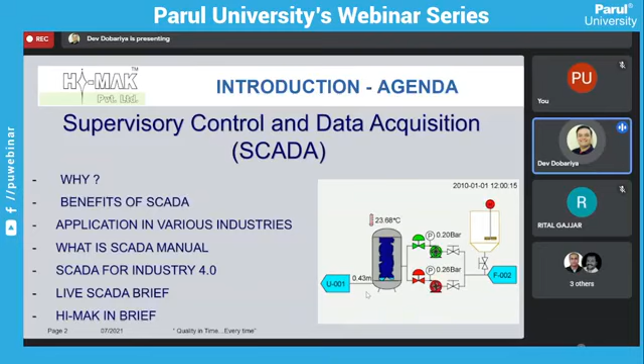That also we'll see. Then also we'll see a live SCADA available in the market. One of the engineers is available on site for a performance trial. That SCADA is about to be handed over by our customer to their end user who is actually using the SCADA. So we'll see the actual live demo, live screens of the dairy plant, online, and we'll brief about what we are doing as Hi-Mak.

So first we'll start with why we want SCADA. These are the key parameters where SCADA is required. A real-time status of the plant or machine. View of parameter values and interlocks. PID set points: proportional, integral and derivative. Set point entry and actual parameter, what PID output is there. Real-time trends, bar graphs, charts for viewing.

Process alarms, where some particular temperature or analog value is increasing or decreasing. If a particular limit is crossed, then an alarm will be generated. Then system alarms: if the PLC is not working, or some HMI is disconnected, power supply failed. Then operator alarms: if the operator has changed some values, it is to be logged. Because after 2 days, if someone asks who has changed this value, we cannot have any audit. So the operator alarm has to be logged in the system.

Status monitoring of network equipment. Like one plant is there and multiple sub-components will be there; it will be monitored in the SCADA. Then log view and report archive values. Anything that is changed, or any parameter, has to be logged with respect to time. It will be logged, and the report will be archived, or we can see the report based on time. We can report based on batch value, or upon change request; that kind of report will be generated.

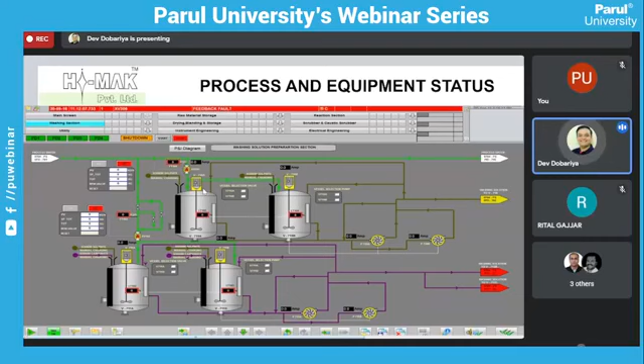Then faceplates. A faceplate is basically where each pump, motor, valve will have multiple information. If we see in the screen, these are main screens where we have multiple pumps and fans, or agitation will be there. But sharing the multiple information on a single small pump is difficult. For that, SCADA is putting a faceplate on the particular pump, fan, valves, agitator, PID blocks, and that will be popped up by faceplates.

Once you click on the pump, this faceplate will pop up and be shown. We can see the multiple data on the faceplates. Now we'll see what SCADA will help us with.

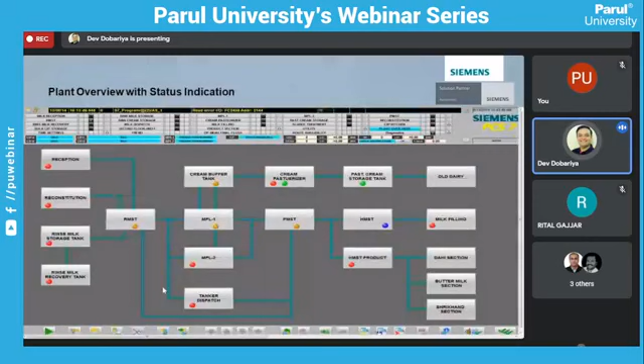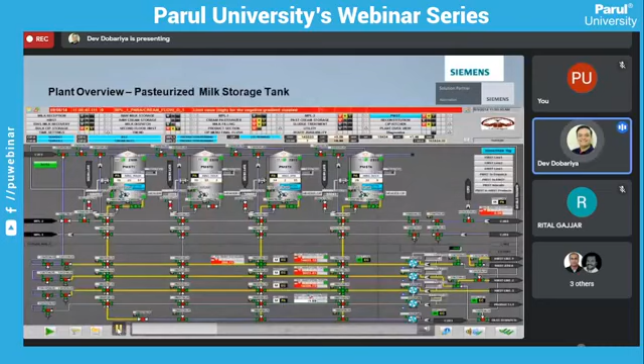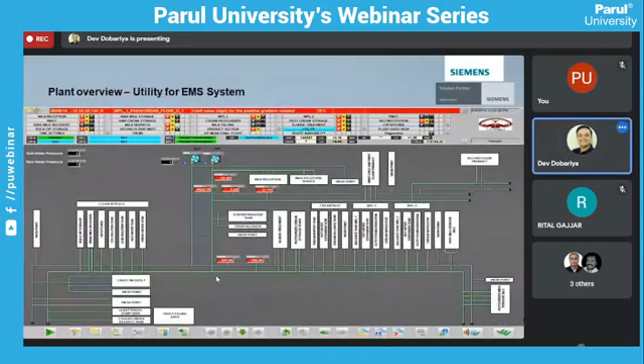If you visit this dairy, they will allow you, and you can see all the panels or automation system, or DCS system. There is no manual intervention. The complete process is working on auto mode. So we'll see a few screens of this DCS system. These are the system architecture for the SCADA. These are the area block diagrams we have shared. These are pumps and raw material silos. These are the main milk processing line. These are the packing machine interface. And these are tank farm areas and utility interface.

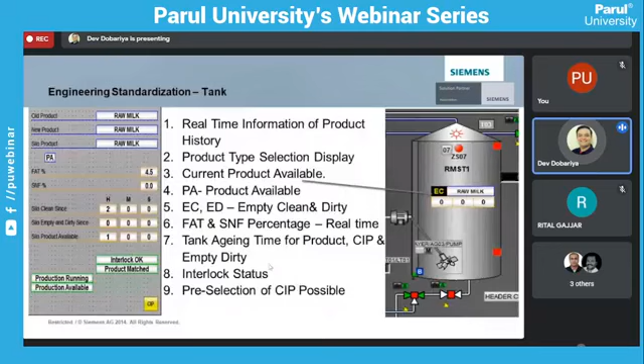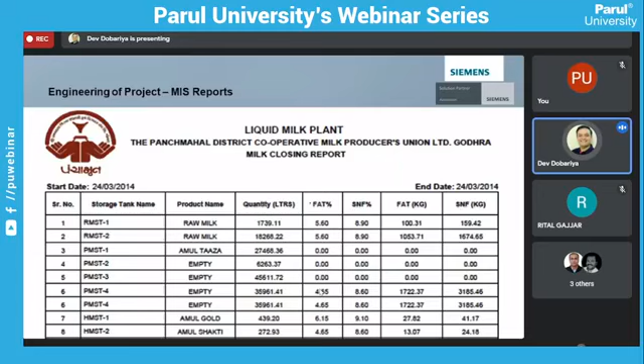Then how this automation will be is based on control matrix, tank farm or tank interface, then pipe and engineering section. We have multiple block diagrams before the SCADA is prepared. Here the engineering priorities are defined, and the recipe management, the routes of the available status for the dairies, and these are manuals. And automated reports are generated for the dairy plants. Because we are going for a multiple industries domain presentation, we cannot stay stagnant on one particular dairy.

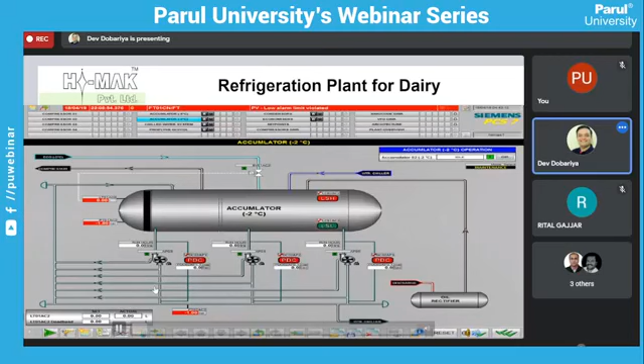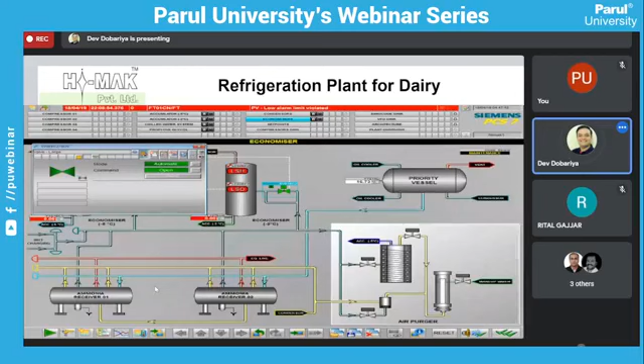The system architecture, where the redundant system is provided. It is for Sabar Dairy, and it is for the compressor automation system. These are the compressors and evaporator, and economizer, and there's more motor data available on IMCC, Intelligent Motor Control Center, and VFD data.

Now, another sector we will see today is an edible oil plant. If you heard about anything, the seal oil, or you can say palm oil production. This is one of the sectors, the edible oil sector, where we have supplied this automation system.

If you have been any time in Gandhidham, you can see multiple edible oil plants like Cargill, Seal Oil, Adani, Wilmar. All such oil industries are using automated systems, where the tank farm control is there, then water system, filtration plant, boiler plant, power plant, all connected with the SCADA system, and it is 100% monitoring based on the SCADAs.

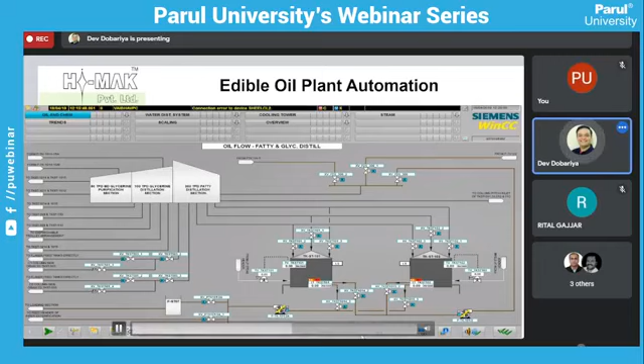Another sector is chemical process plant. Like Gujarat Alkalis and Chemicals, they are manufacturing alkali. Then if you are in Baroda, there is GSFC, manufacturing fertilizer. But in the same plant, multiple products are manufactured: nylon, melamine, then urea. These are the typical products. If you have been any time in GNFC, they are manufacturing phosphorus-based fertilizers. These processes require stringent process automation.

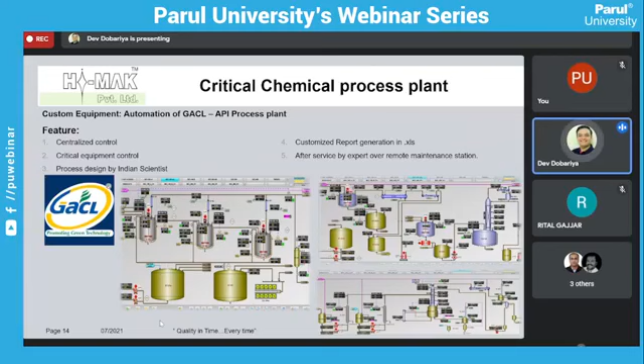And some of the products GACL is manufacturing for Indian industry, the Indian defense industry also, there is hydrazine hydrate. This is one of the plants where the critical equipment was installed, and the product manufactured, hydrazine hydrate, is used for our rocket fuel applications. This automation design was done by our Indian scientists at IICT Hyderabad. First it was installed as a pilot plant, and now the commercial plant is under commissioning stage. So any critical product first will have a pilot plant, and then a commercial plant.

The SCADA remains the same, but the first one or two GUIs, or interfaces, will be changed based on the requirement. If you see here, they mention section 100, 101, 102, 103. They will not mention the product name. Why? Because this is the secrecy maintained by Indian industries, because nobody wants to share this knowledge or engineering used for our defense industry, and we are proud to say we are part of that secrecy agreement, and we'll maintain the same for our Indian industries and defense products. So these are some key factors in industry. We have to maintain that kind of forum where the product will be there, but we cannot share some of the component names.

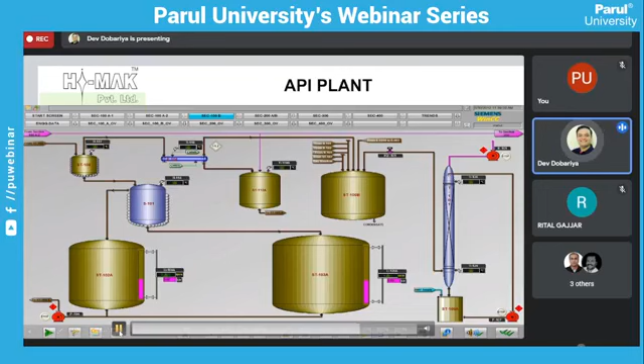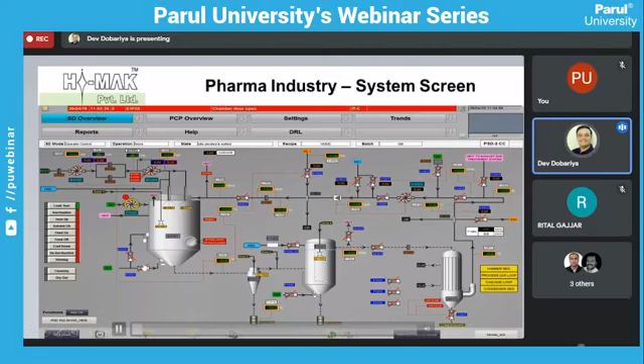Now we'll go to pharma sector. As you know, with the pandemic, the pharma sector is booming, and they have to be compliant with the 21 CFR Part 11 system. Once they approve this Part 11 system, they can launch their product in the open market. So this is a SCADA screen we have supplied to one of the biggest pharma customers. This is an overview screen, and a block screen where multiple valves will be there. Trends logs will be generated and stored. These are the process alarms.

And a recipe. If you are making tea or coffee, there are 4 or 5 set points. But if you are making a pharma product, there are multiple set points and multiple processes, like insertion, heat up, solvents, feed out, feed in, wetting, cool down, cleaning, and dry out. Each process has multiple set points and multiple products, and batch mixing is there. So each recipe is critical for any pharma industry. Once the recipe is done and the batch is prepared, the batch report will be signed by the batch manager and the supervisor, and once the batch is approved by the test lab, it is dispatched to production and logistics for dispatch.

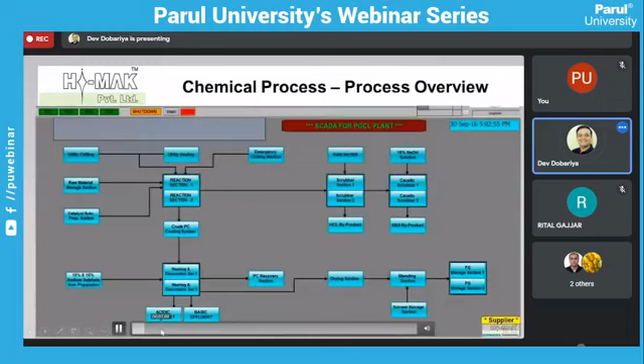Okay. Another plant will be a chemical plant, where the chemical plant has multiple layouts. These are the system architectures we have supplied. These are areas in the chemical process, each process we want to share here. Each area or industry wants a separation. Like, the pharma industry wants audit, the chemical industry wants safety of the components or safety of the system. The dairy industry wants multiple information.

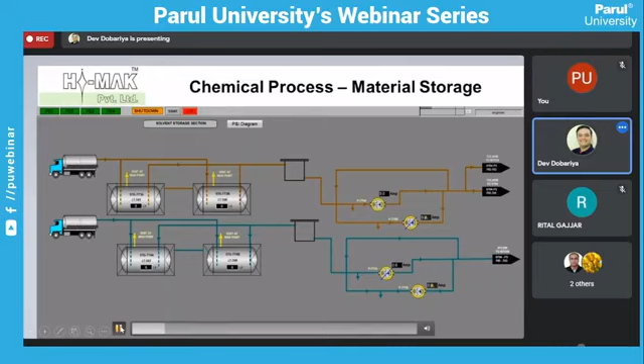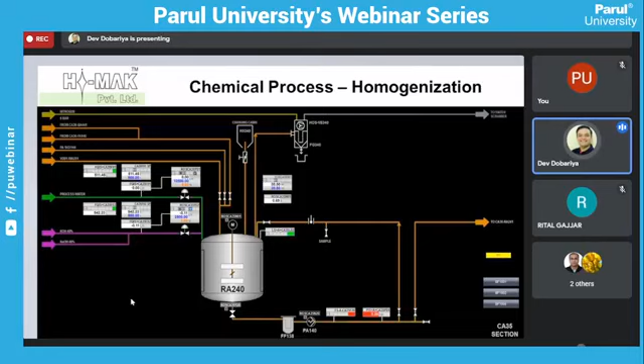Here it is a kind of reactor where homogenization is there, where hydrogen has to be filled for the reaction process. It is a very dangerous process where endothermic or exothermic processes will be taken care of. So temperature control will be there, and these are runaway reactions. These are the chemical reaction process controls.

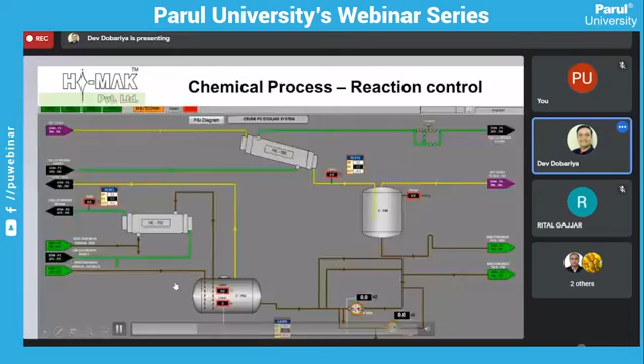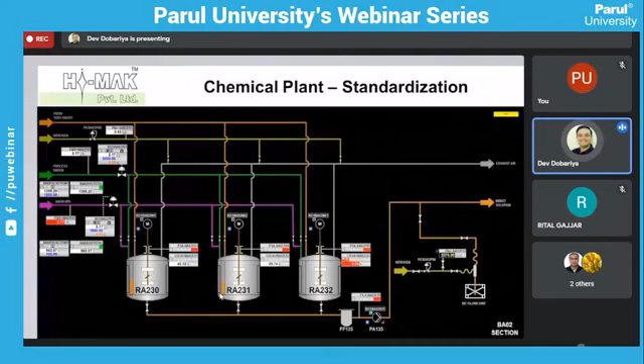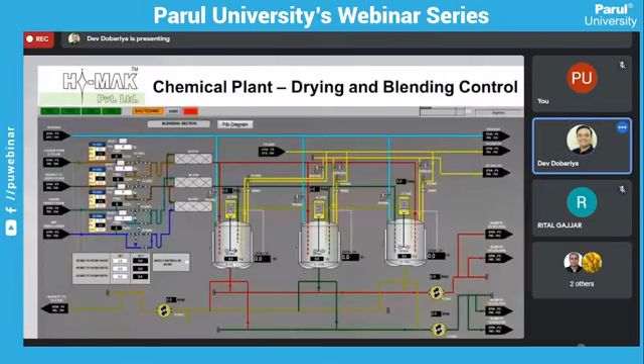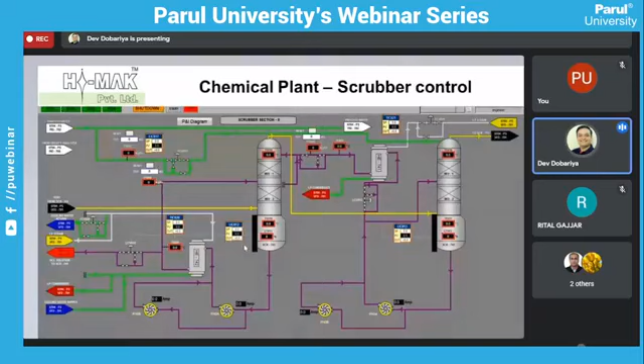Hydrogenation, then solution preparation. And concentration, where the particular product concentration is to be increased with temperature, or maybe we can say vacuum. Tank farm controls, drying and blending area, then material transfer, and product storage and retrieval system. These are the utility monitoring, where the product is coming and going, and ETP monitoring. This is scrubber automation, where if some chemical cannot be directly evacuated to the atmosphere, it has to be controlled with the scrubber.

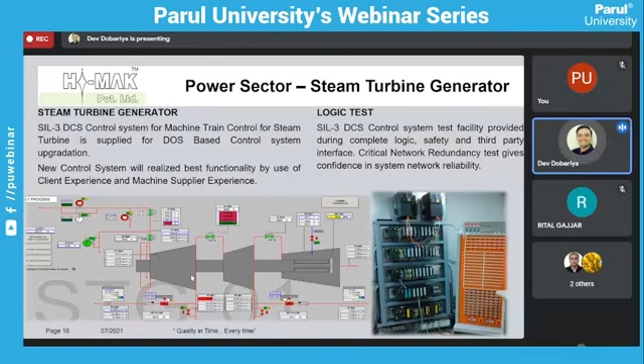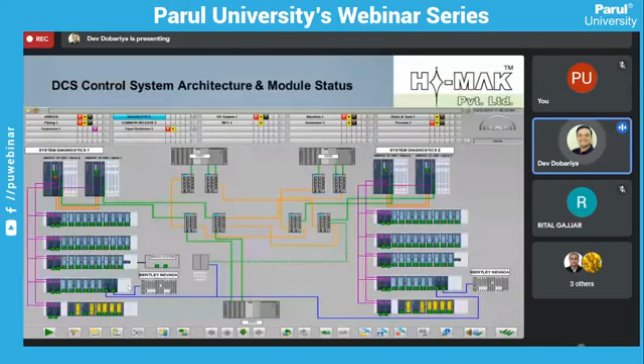Trends of the system, alarms and events, faceplates. Then power automation, where steam turbine, solar, wind, hydro are the typical areas where SCADA is typically used. This is for Reliance Industries, the power plant automation we have supplied.

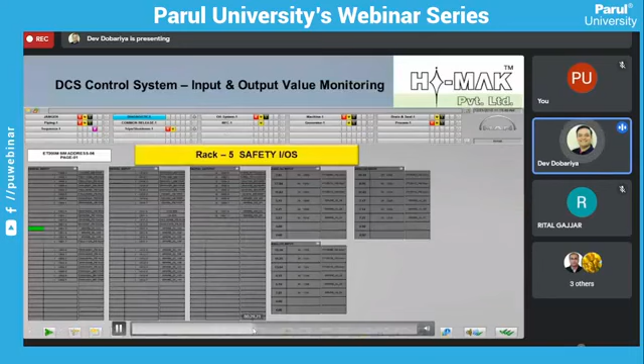In power automation, if you have heard about any boiler or steam turbine control system, they always have safety loops. So what is safety? Safety is required for any overspeed protection or any critical utilities. Like if it is a turbine, the turbine oil circulation or oil cooler pump cannot be stopped at any cost. Otherwise, the turbine lubrication will be stopped and the turbine can be damaged. So that kind of input will be part of the safety.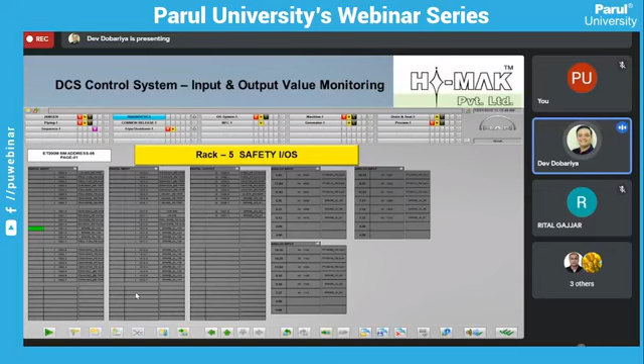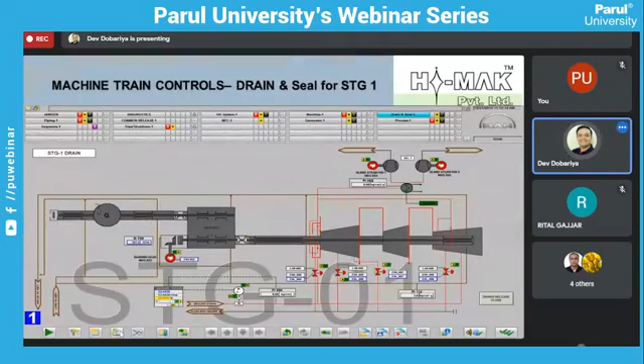If you know about IEC 61508 and 61511, these are the safety standards derived in industries for the safety environment, where critical safety for chemical, power, automation, and oil and gas will be implemented. So safety has to be taken care of mainly for power automation, where megawatt-size turbines are there. This turbine automation was done for a 24 megawatt power plant, STG1, like steam turbine generator 1. Here we want to share the SCADA requirements for process, for dairy, for chemical, and for power plant. These are the different ones.

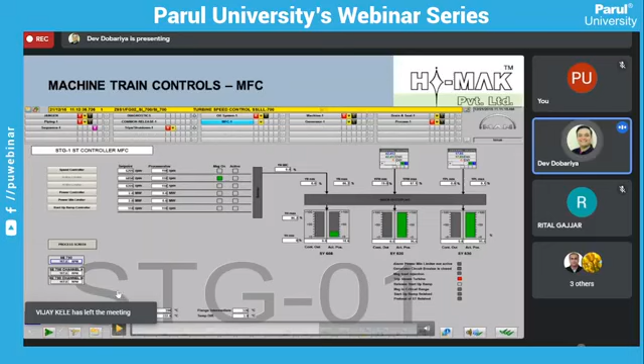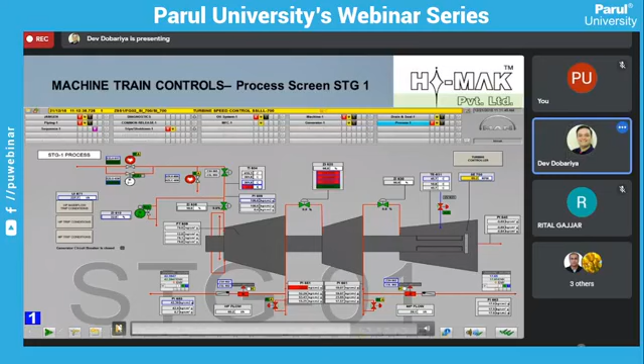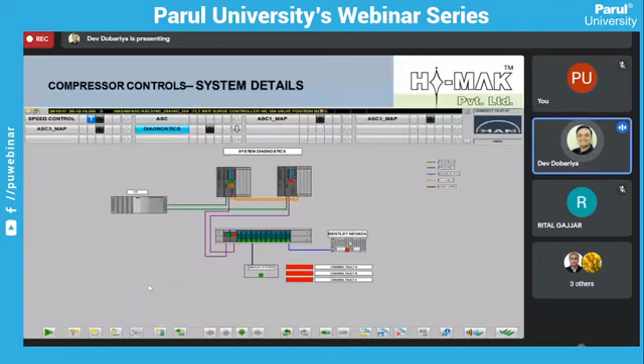Here the multifunction controller, or MFC, is used to synchronize the generator with the power grid, or multiple generators can be synchronized. Here the mimic will be a very basic one, but the parameter values are very critical, like pressure transmitters for first stage pressure, second stage pressure, or main HP or LP pressure. These are the sequences 1, 2, 3, 4, 5 for the startup of the compressor or the automation system. These are for the steam turbine control system, used for big ratings of compressors.

The next area we will share with you is about test setups. Any product manufactured by any engineer has to first be tested at their test facility, checked, verified, and the test report is generated, and then the product is sent for dispatch to the industries. We have done one test setup for Alstom turbines. This is for hydro, horizontal and vertical turbines, Kaplan and Francis turbines.

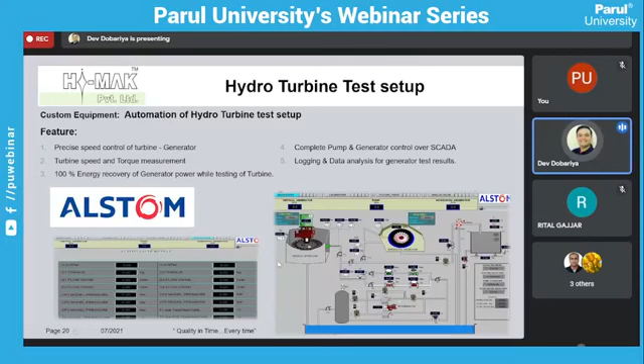Based on that, we generated the force of the water. We generated the power. Power was fed back to the main grid, and the test setup power consumption was based only on mechanical losses. So this test setup was done, but we cannot share the screen due to the secrecy agreement. But just to brief about it, SCADA was also used here for testing results, parameters and controls.

If the DC ampere is less than the average, then it will have alarms. A 5 megawatt plant will be around a 20-acre area. Engineers cannot move to all the areas and measure the current, but the current will be monitored in the SCADA. If current is less than the average, it will be checked whether the plate needs cleaning or any module is damaged; it will be reconnected and the current will be up. So these are the requirements in the solar industries.

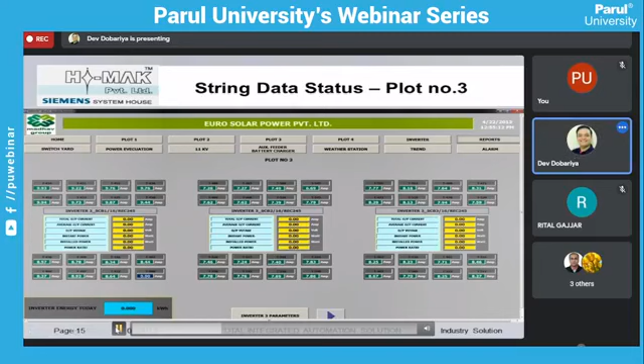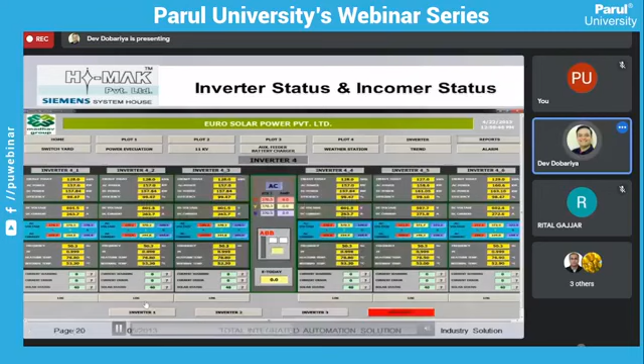Then the inverter will be there in the solar plant. Once the DC is collected, inverter monitoring is done through the SCADA. Multiple inverters are connected on Modbus or any protocol available in today's market to the SCADA. Inverter monitoring is there. Inverter alarms will be logged in the system and reported. Then power is connected to the LT voltage, then to 11 kV VCBs.

Each VCB, vacuum circuit breaker, will have voltage, current, power factor, import and export. Import is when the sun is not available and power is used for internal purposes like pumping and cleaning. It is called internal auxiliary power. Once power is generated in the plant, it will be connected to the outgoing grid through the outgoing breaker.

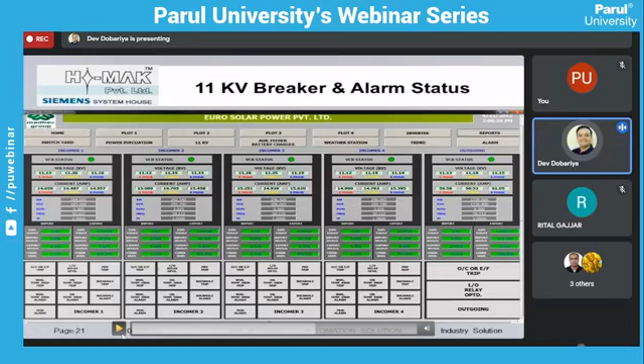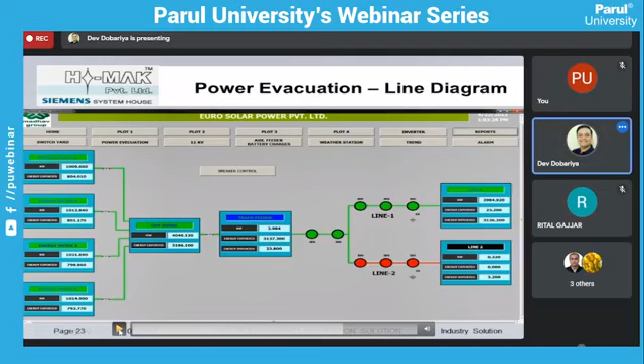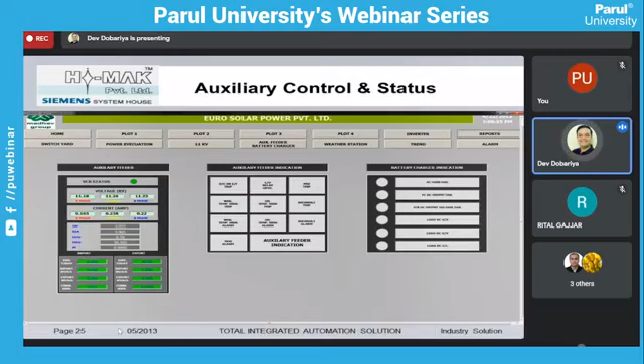The status of the breaker can be seen here. Here are 11 kV multiple incoming feeders, transformer feeders, and line 1 and line 2, which are basically to export the power to the grid. These are the typical SCADA screens we will share with you, because this will be available in the market for a minimum of the next 10 years, as this SCADA requirement is basically today's requirement for the industries.

Automated reports will be mailed to the operator or user based on the day's production, full day production, the import and export, and automated mail for each inverter-wise production and active and reactive powers.

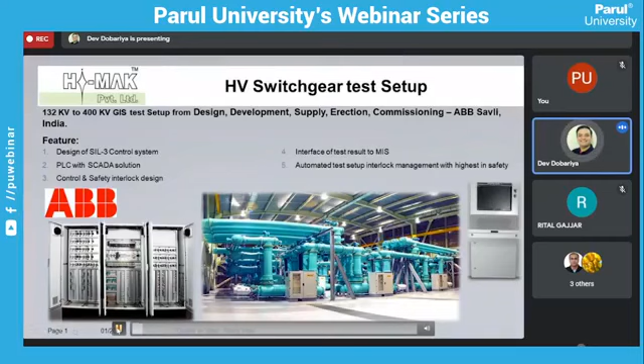We'll see a few high voltage SCADA screens. These are typical products that were tested here. Like the process SCADA, chemical SCADA, and power plant SCADA, here is the SLD. For medium voltage lines, like in MGVCL or PGVCL, or a high voltage line, the same kind of single line diagram will be shown on their SCADA screen, like 145 kV, 420 kV, 245 kV.

Here, a BD, typically a detector of SF6, is present. QC is a kind of switch and QB is a breaker. This earth switch is there, and QB is a breaker. The interlock is monitored via the triangle, and if it is green, then we can operate the particular breakers.

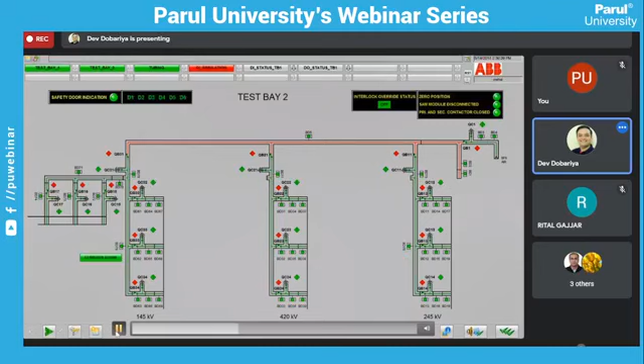Once QC or QB needs to operate, it will have a small pop-up with an open or close button. As it is a bigger switchgear, the opening and closing time is to be monitored in the SCADA system. Once it is open or closed, it will be shown as open or closed. Otherwise, it will pop up as opening or closing. It will not say directly that it is open or closed.

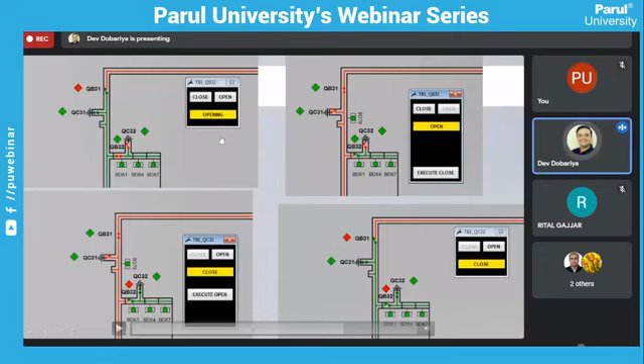Open, close, execution open is opening, open, close - these are typical requirements for electrical industries, medium voltage. Another area for electrical and automation is dryer automation, where a bigger rating transformer has to be dried and maintained. This is another latest version of GUI used as templates for this SCADA.

If you can see this SCADA operation, the screen view and operation is 100% different because the templates are based on the latest one called touch GUI, where multiple touch controls are configured at multiple locations. A tag on/off switch is also mentioned, where the tag can be removed, hidden, or unhidden. Some blocks or formats are used based on the latest mobile operation style people are looking for as GUI.

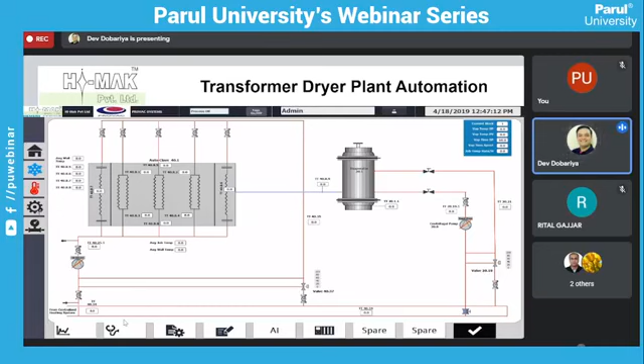Like heating, cooling, setting buttons, home button - these are for setting operations for heating and cooling. These are the settings where pump selection is there, parameter selection, utility status, and timer settings.

We cannot say SCADA will always look the same, but day in day out manufacturers are making changes. It is a requirement for the operator to have easy operation, so without manually operating the system, this SCADA is more useful - including warning alarms and settings.

This running plant - if you have been to Ranoli, there is a Baroda transformer company doing the drying of transformers of any size, and this was one of the projects developed by Provac and used in Baroda Transformers.

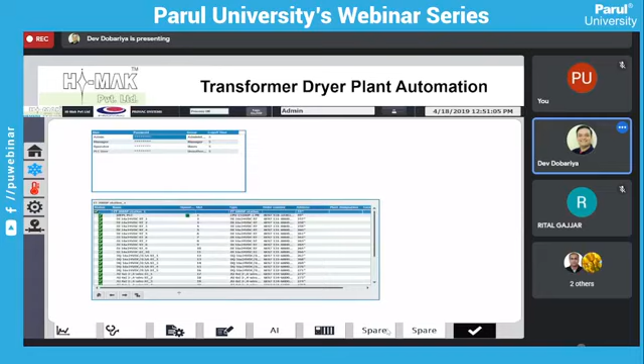Now we'll go to another sector called oil and gas. Gas, as you've heard, is for CNG for car and automobile applications. For PNG, it is for regular kitchen application, or household application.

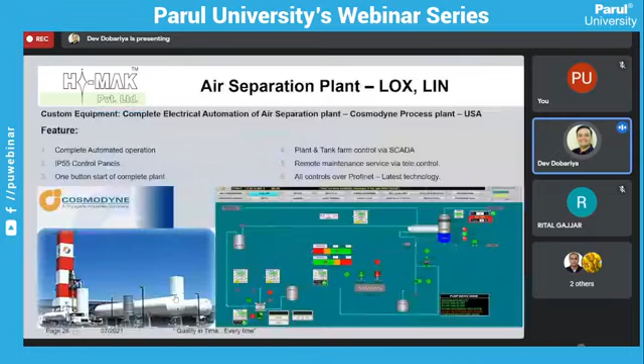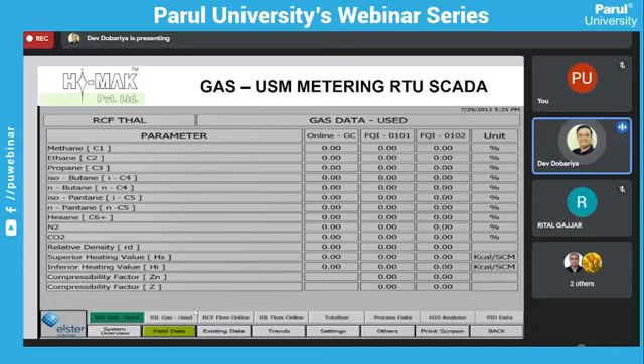Here, another requirement for SCADA is data recording, where data is recorded for calculation of gas flows, and gas flow has multiple parameters to be monitored like temperature, flow, and pressure. Based on these three, the AGA formula - American Gas Association - has given the formula for gas measurement, and the latest AGA will be implemented and the data recorded. These are for gas automation, gas RTUs, basically gas flow meter verifications and alarms.

Now, because of the limitation of time, we'll go to the latest real-time SCADA screen of Verka Dairy. We'll share the screens with you - Chintan will share and give a brief about this project.

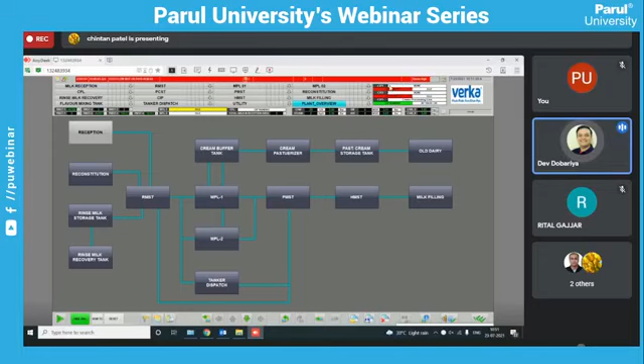And the topmost portion is showing the current alarm. So right now it's showing a feed flow not okay for a particular device. And this topmost corner area is showing the CIP running or not running and the status of the particular circuit. Okay, now I will go through one area at a time.

Okay, so this is the milk reception area. Tanker will come here and then this process happens, like tanker reception. This is its controlling area. So you can see here the destination. We have three destinations, three RMST. The operator will select one of the RMST which is available for filling.

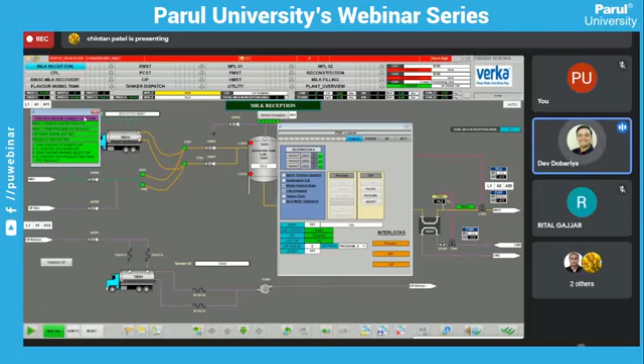Here you can see there is some interlock. Green indicates the RMST is ready for processing. So from reception, milk will go to the RMST area. Normally, whatever milk comes in the tanker, during the traveling time the temperature will rise, so it requires to be chilled. So my milk is chilled to 4 degrees. This is the heat exchanger area in which chill water comes and chills this milk at reception.

After milk reception, that milk will be transferred to the RMST area. This tank is showing that it is having 40,000 liters and temperature is 9.1 degrees Celsius. Its status means this tank is sterilized. ST indicates tank is sterilized, clean, and it contains product. The other tank is sterilized, clean, but empty. Same for RMST3, sterilized, clean, but it is empty.

This is one of the functions, called tank function. It shows all the data, the tank content status. Currently, it is having the product. Tank agitation, you can see here, this is the agitator, meaning it requires to be turned on and off. So currently it is in auto off mode.

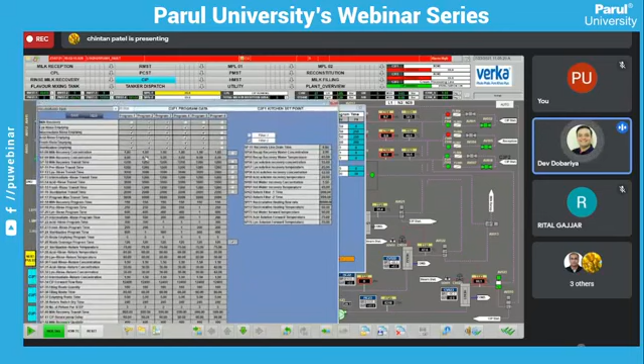This is the typical recipe parameter and controlling parameter for CIP. I have selected the reconstitution tank, and these are the recipe parameters for doing the cleaning for a particular line or tank.

Then this area is the tanker dispatch, for pasteurized milk, RMST, and pasteurized cream. Suppose one dairy needs some extra milk, or a particular dairy has a shortage of milk, so milk will be transferred to that dairy through this tanker dispatch area.

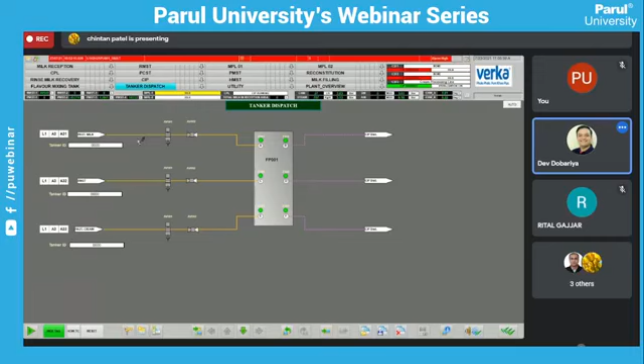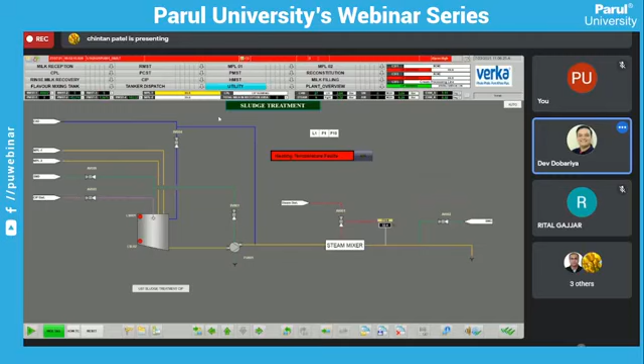This is the sludge treatment area, and this is the flavor mixing tank. This is the rinse milk recovery storage tanks.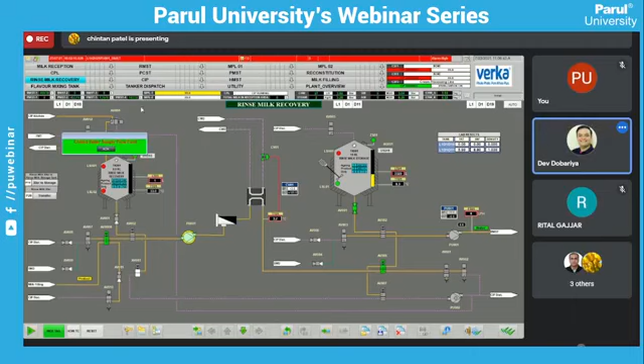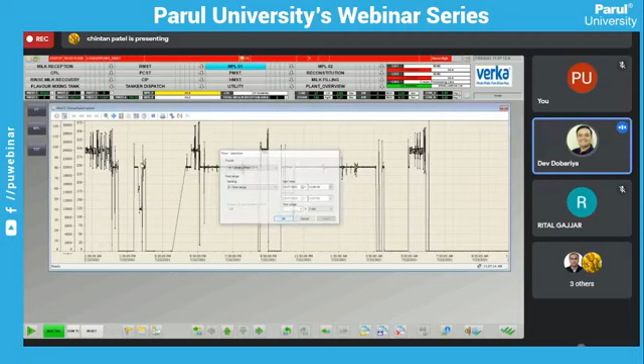We'll show some trend parameters, how the trend is logged in the data. I can select the parameter which I want to observe. I have selected one flow transmitter, and suppose I want to check the last 1 day data. I have selected last 1 day. It's showing the real and historical data.

I can also calculate the minimum maximum value from this data. You can see here the maximum flow was 30,955, the average flow was 13,382, and the minimum was 0. You can also bring this trend in for record purpose and audit purpose.

So I will show some alarms. This is the alarm log. You can see here MPL2 recon interlock 8 is unhealthy, so this device is in fault mode. C indicates the alarm has come, and G indicates the alarm has gone.

So this is the operation list. Suppose I want to backtrace who has started the CIP of P001 root area. You can see 857 Diljot, this is the operator name who has started the P001 CIP. So you can backtrack who has done the activity. If some abnormality happens in the plant, you can backtest and find the root cause from this log.

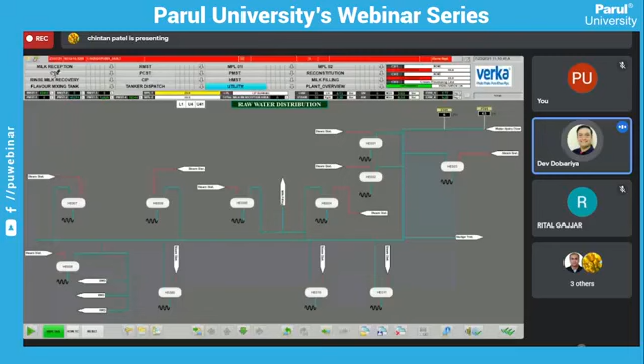You can see here CPL area CIP is running. You can go and check what is happening here. CIP is going on, CIP started, start interlock, recirculation interlock, etc. CIP is running, and watch, it is started with program number 3.

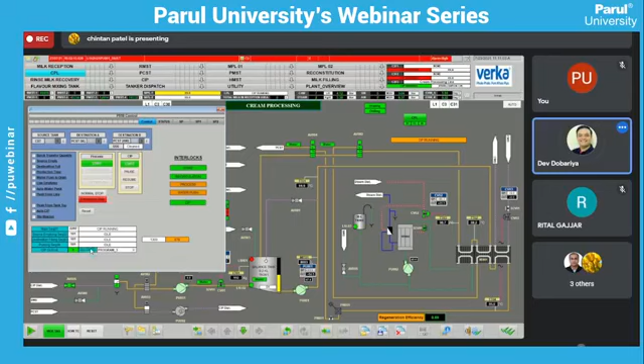Also you can see here cream processing and the third. These are the circuits, circuit 1, circuit 2, and circuit 3. For doing the CIP for the entire plant, we cannot do it with one single line or one single circuit, so here there are 3 circuits for doing the CIP of a particular area, tank, and so on.

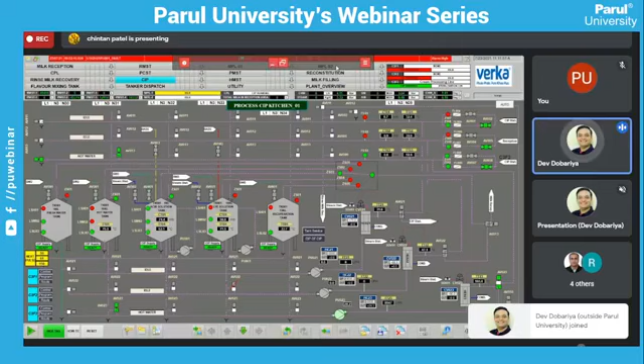We'll go to the next page, where we'll see the specification of the SCADA, or what the SCADA requires for the specification to implement. ISA is a body which has defined the standard for the SCADA, that is ISA 101.01.2015. The latest one is also available. So anything required for the SCADA has to be based on the specifications derived by various industries and international standards. So the purpose is already defined: why the SCADA is required, what kind of SCADA.

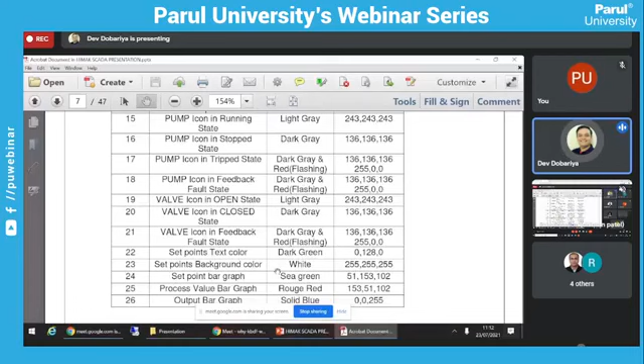When we are doing any SCADA development, there's some background color, then an RGB palette will be there. It has to be a number. So we cannot say I want a green SCADA or a blue SCADA for my plant. It has to be defined based on the industry standards. Like milk is defined in yellow color, but there are multiple yellows. You can have a light yellow or a dark yellow, but no, it is always based on the RGB numbers, and based on those numbers the SCADA has to be prepared. If it is RGB, these are the numbers and palettes that will be used.

So for valves, if it is an open valve or a closed valve, the definition has to be used for development of the SCADA. We cannot say I want a small box as the SCADA symbol for these valves. So each product we have shown you on the SCADA, such as a pump, valve, alarms, will always have documentation. We'll have colors, background colors, alarms with priority, what is flashing or not flashing. This is to be documented properly. These are the documents specifically defined by ISA.

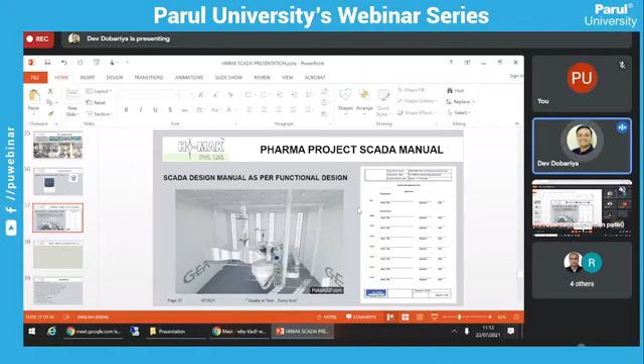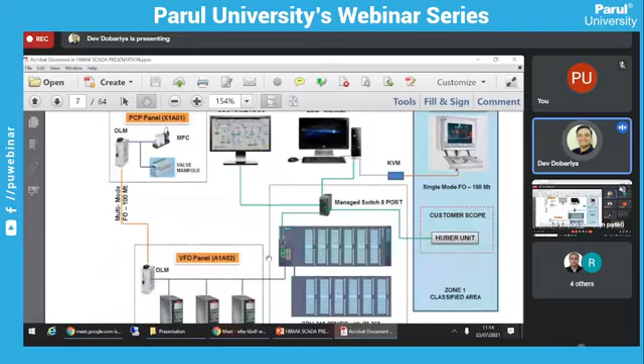Once we develop the SCADA, we'll supply it to the customer, and that customer also requires the manual to operate the SCADA. So these are the kinds of manuals we have to prepare and give to the customer to operate the SCADA: the architecture supplied to the customer, the hierarchy of the SCADA screens, the upload/download process, the help menu, alarm screen, what the alarm is looking for, and user management.

So what kind of settings we have done, like automatic logout, or expiry of the password after 90 days. If someone sets 70 days, it has to be documented here with the 70 days. If there are warnings, 7 warnings will be given and then expiry. That kind of document is to be prepared for the SCADA and handed over to the customer, and then it will be used by the user. Without documentation we cannot maintain the reliability of the SCADA system. So each time the document has to be updated if parameters are changed.

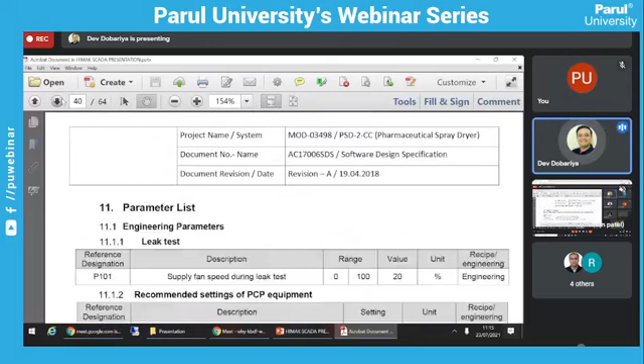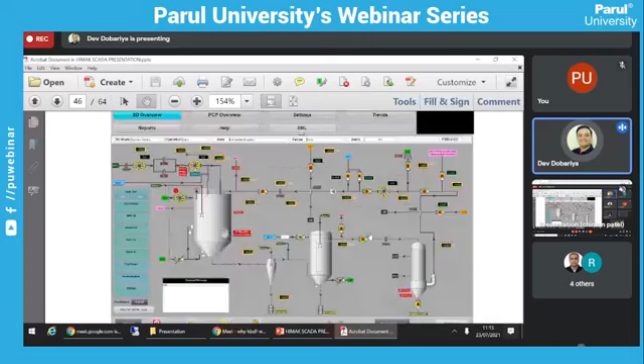And the philosophy for these numbers, or we can say blocks, also has to be documented. So these document manuals will be prepared before the handover of the project. We prepare this kind of document as a developer, and this screen or document will be audited by a third-party auditor, confirming this function will be properly utilized and will not hamper the process as well as the safety of the system, because safety is a major requirement for the process industries, pharma or chemical industries.

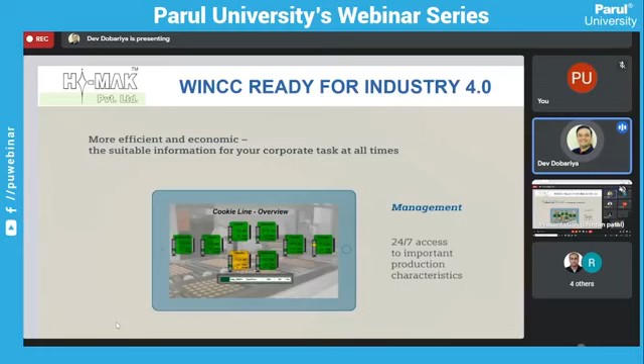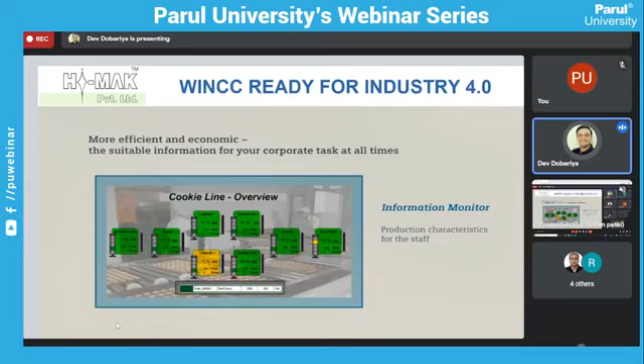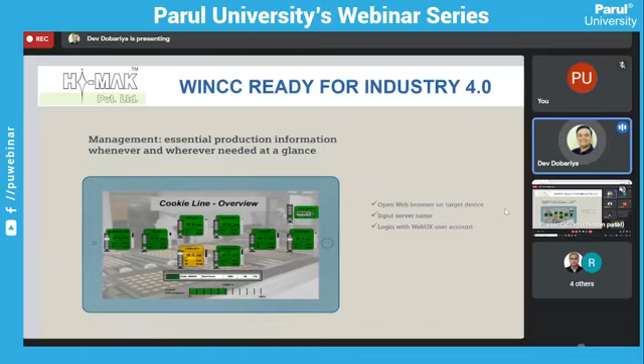Now we'll see what people today are looking for in Industry 4.0 with SCADA. These are about the WinCC.